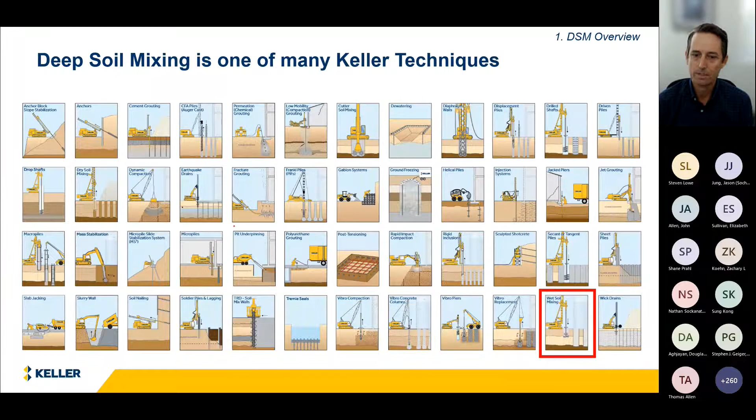So deep soil mixing is a technique where we use a large, high torque drill rig, and we mix a binder that's typically water and cement in a batching plant. Then we pump that water-cement grout down through the hollow stem of the Kelly bar and into a mixing tool that mechanically blends it with soil to create soilcrete.

The soilcrete has a compressive strength. Typically for design, the average strengths run from like 100 to 500 psi. The typical depths of treatment run up to about 110 feet, and that can vary even deeper in some cases.

The columns can be combined to form panels or grids or clumps of columns. It's very flexible, the way you can arrange them to pick up loads and resist seismic forces.

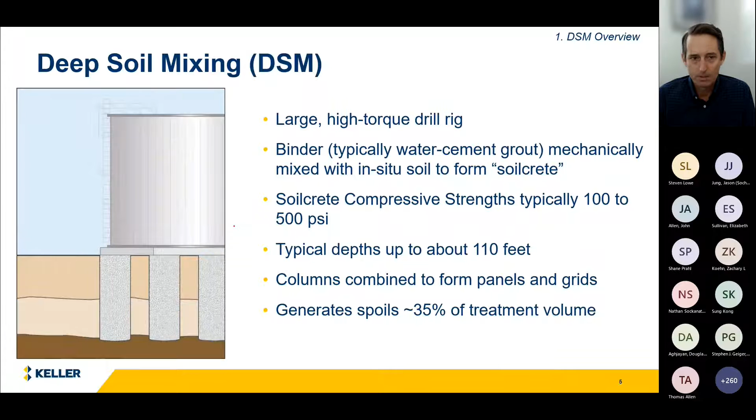One thing to note is that the technique generates some spoils, because whatever volume of grout you're pumping into the ground becomes essentially the same volume of spoils that come out of the hole as mixed soilcrete. That needs to be either disposed of off-site, or if processed, it can make a really good compacted structural fill on-site.

Here's a typical layout you would see at a soil mixing operation from Keller. Number one, you have the batch plant in the upper right corner, where we have silos of dry cement powder. You see the delivery truck - we need room for a delivery truck to come in and charge those silos regularly throughout the day. In the middle, there's the tank where we mix the water and cement to make the grout, and then it's pumped over to the rig down the hole.

You also see the deep soil mixing rig doing the mixing itself, and a pre-drill rig that we sometimes use to either pre-loosen holes or create a cavity to allow some of the spoils to fill in, as opposed to hauling them off-site - that's one way of reducing the amount of spoils. You see a loader; we typically have a loader and/or an excavator moving spoils around. And then you see a coring rig, where we're doing our quality assurance coring of the columns - I'll talk more about that later.

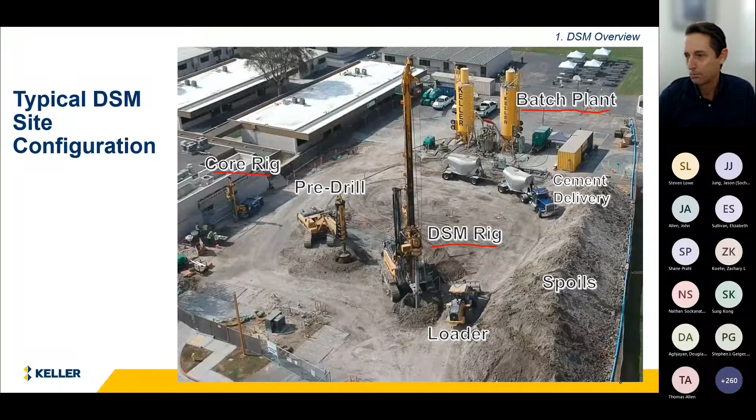Here's a couple other photographs. On the left side, you have the batch plant. On the right side, the soil mixing rig with the wet soilcrete, and previously mixed columns along a panel. You can see that the wet soilcrete is sort of like a peanut butter shake consistency, and within a few hours it typically sets up. But you need to be careful around the wet soilcrete holes - safety is an issue - so we're typically barricading and blocking areas off so people don't walk around or equipment doesn't come close to the wet columns.

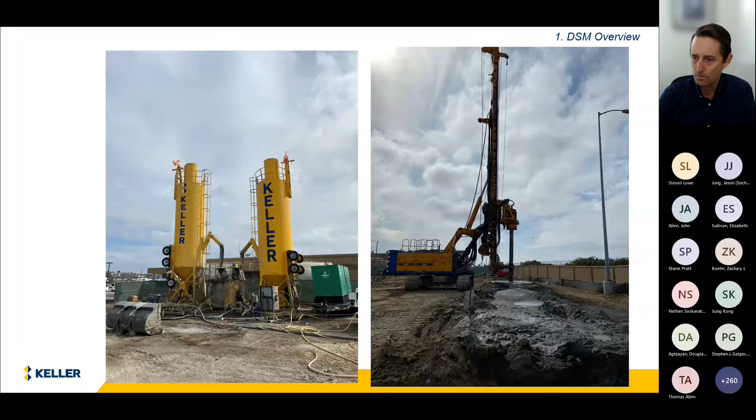Here are some examples of different configurations we can use for various applications. On the left, you have shear panels that we can arrange to resist slope instability. In the middle, you have isolated columns, which can be used primarily for settlement mitigation. And on the right, you have a lattice grid of intersecting panels that can be used for liquefaction mitigation primarily, or for seismic or static settlement mitigation as well.

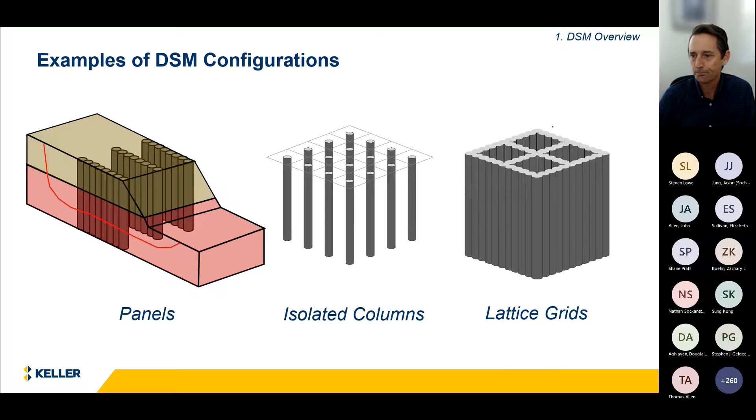So when we talk about deep soil mixing mitigation for seismic hazards, we have three effects that are occurring when we do deep soil mixing. One is solidification. So whatever material we are mixing is going to be turned into a solid, something like a soft rock.

And then we have shear reinforcement. So typically we're not mixing 100% of the soils, so any soils left in between, like in the lattice grid of panels, is shielded by the shear reinforcement of the DSM grid. I'll talk about that a little bit more in a minute.

And then for foundation load support, we're able to put these underneath the foundation so that we can just take up the loads in the DSM, and it's acting kind of like a deep foundation in a way.

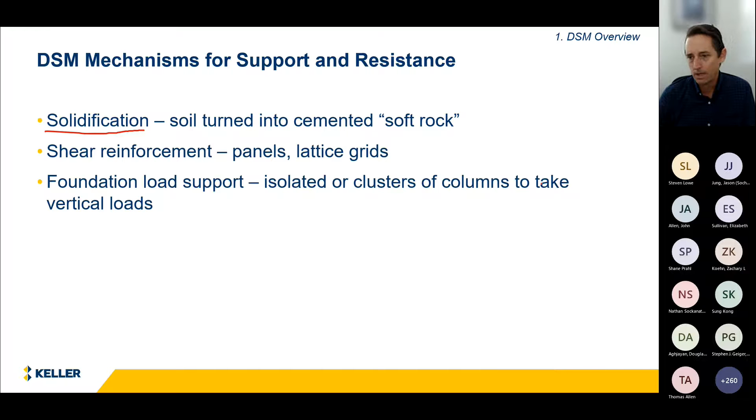So for the shear reinforcement, there's been some research done on this topic. Basically, a series of numerical analyses and centrifuge experiments were done where we looked at how much of the shear stress is going to be taken by the DSM versus the soil left in between the DSM cells. These relationships were developed where we could estimate the shear stress reduction, or the cyclic shear stress reduction, of the soil in between the panels.

And this chart shows the results of that. G sub R is the ratio of the shear stiffness of the soilcrete to the soil, so that typically is ranging around 20, 30, something like that. And AR is the area replacement ratio, so that's just the area in plan of soilcrete divided by the total area.

With deep soil mixing for liquefaction mitigation, we're usually ranging in this 25% to 50% range for AR, and around 20 or 30 for the GR. So with that kind of range, you can get these R sub RD values, that's the reduction of the cyclic stress ratio, or you can think of it as a reduction in the seismic demand or peak ground acceleration that you're using for your liquefaction analysis. Those reductions are on the order of 80 to 90%, which is very significant.

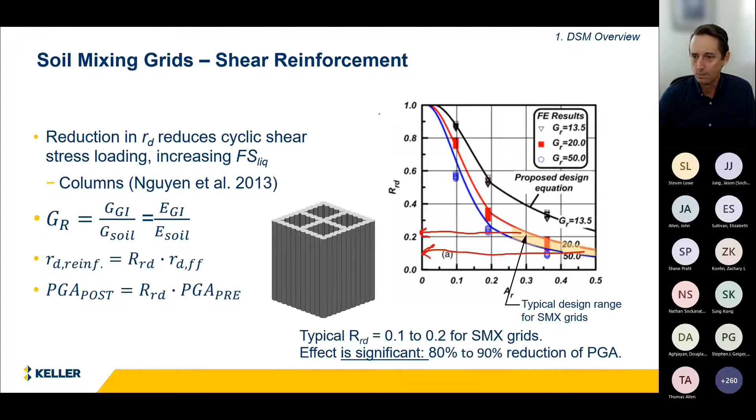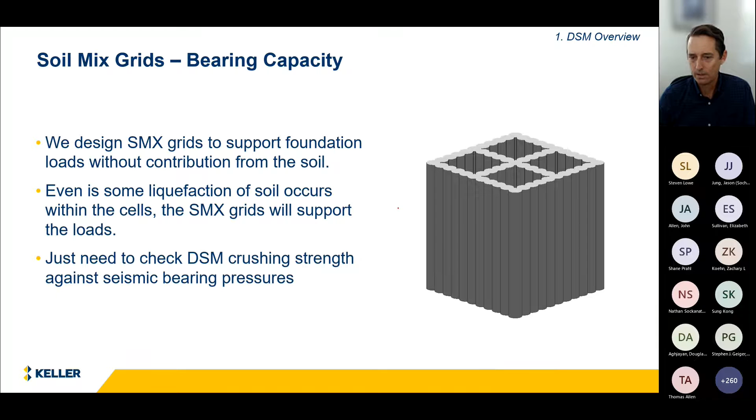And for bearing capacity, we design the soil mix grids to support foundation loads without contribution of the soil in between. So even if there is some minor liquefaction left over that the shear reinforcement doesn't take care of, we're still going to design these DSM grids to support the foundations without any contribution from the soil whatsoever. We just need to check the DSM crushing strength to make sure that we have adequate bearing pressures for the foundations.

Quality control and assurance is a big part of a successful soil mixing job. It starts for us at Keller with a data acquisition system, which records data from our rigs, which are very heavily instrumented. We're recording things like the time, the depth of the tool, the rotation speed of the tool, the hydraulic pressures for crowd and for torque, the grout flow rate, the grout specific gravity, and other parameters that really allow us to track what's happening in the ground very well.

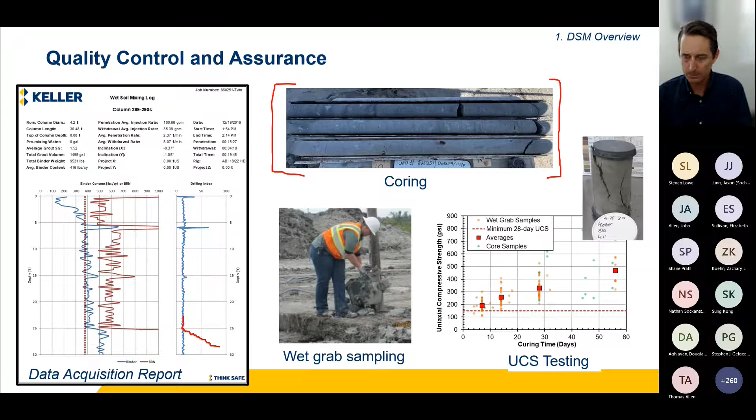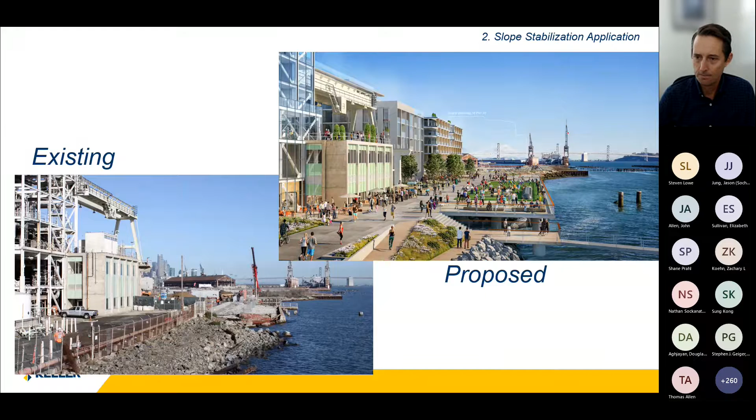But the site, like most sites around the San Francisco Bay margin, is underlain by young bay mud, a normally consolidated to slightly over-consolidated clay subject to cyclic softening under strong earthquake shaking in the San Francisco Bay Area. It's overlain by old fills that had some liquefiable sands within them. The geotechnical consultant determined that the slope would be prone to 2 to 4 feet of seismic slope deformation as a result of the maximum considered earthquake at the site.

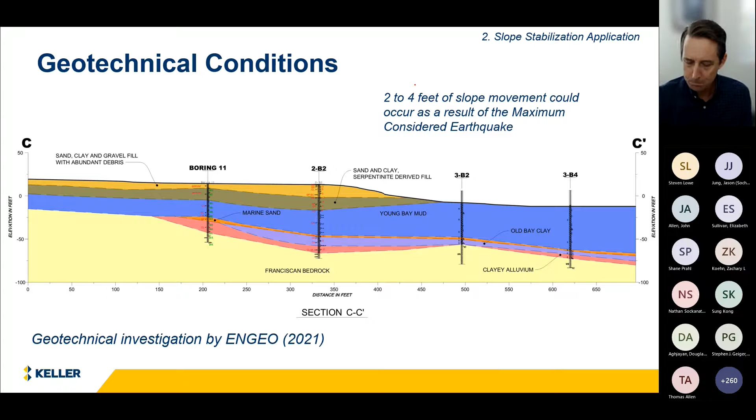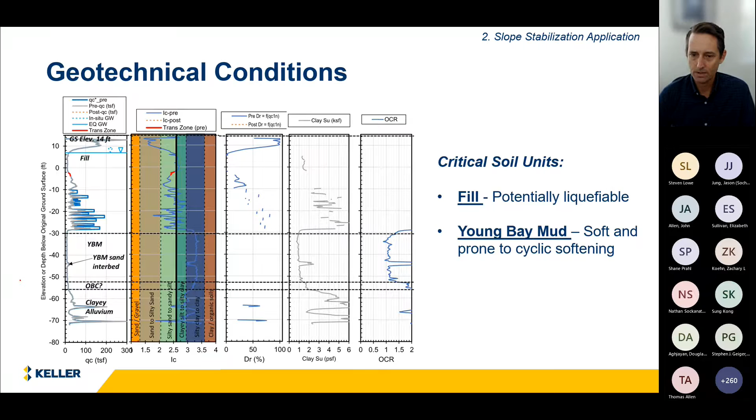To stabilize a slope like this, we can use the shear panels I showed earlier. There are some good references for this in the literature. The FHWA 2013 design manual for DSM is a pretty good one, although it's focused mostly on static criteria and static projects, so it requires some adaptation for seismic purposes. Another good reference is Boulanger and Shao 21 from the DFI soil mixing conference in Poland. I have all these references in the last slide of the presentation in case you want copies of them.

So we do design checks for global stability, overturning and sliding, the shearing on the vertical planes where you have overlap of the columns, for bearing capacity, and for extrusion or flow of soil in between the panels.

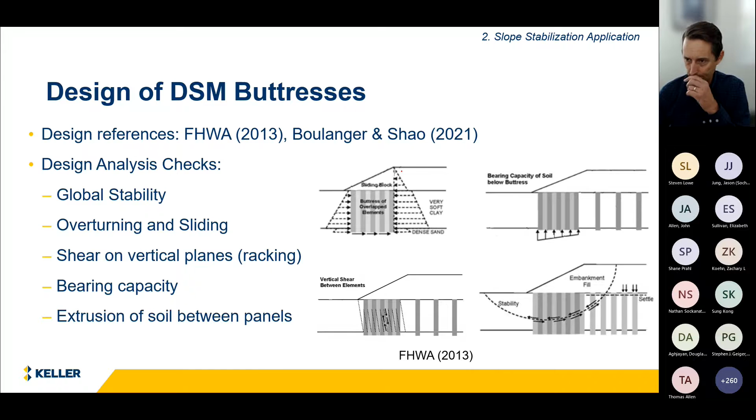At this site, this is basically what our layout looked like. From the plan view, we had 11 columns overlapping—6-foot columns overlapping in a secant way. That's what it looked like in plan. They were typically spaced around 20 feet, and this extended quite a ways in either direction along the front of the water.

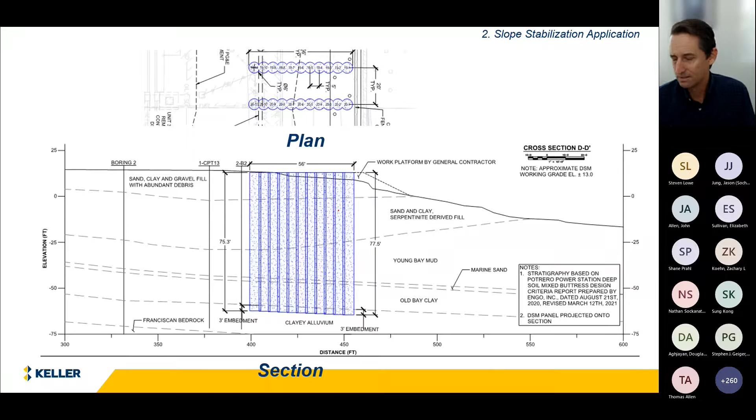If you look at it in cross section, this is the lower diagram. The depths varied in order for us to get embedment into the competent layer, varying up to 75, 80 feet. Some are probably more shallow, like 50, 60 feet.

In this design, we went about it using performance-based methods, looking at the expected deformations and the engineering performance. Here are some examples from different earthquakes of deformations that have occurred as a result of liquefaction lateral spreading, on the bottom two, and as a result of liquefaction flow failure on the upper right at the lower San Fernando Dam failure from the 1971 San Fernando earthquake.

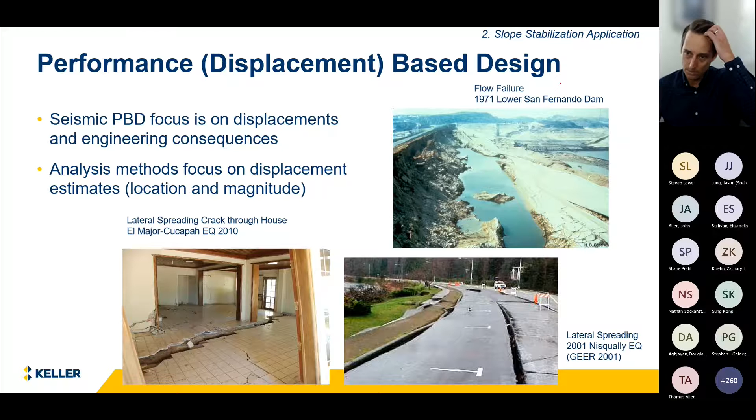Ideally, we would like to use advanced numerical methods to predict displacements for performance-based design when possible. This project, we had the time and the requirement to do this kind of advanced analysis, and we went about it using the computer program FLAC, which is a finite difference method program.

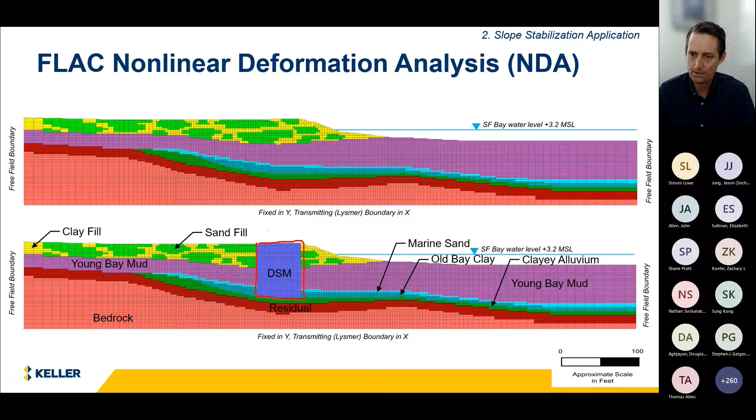Here you see the model on top with the soil layering and the finite difference mesh. This is without the DSM buttress, and the lower one shows the DSM buttress in place. That's a composite material based on a smeared composite stiffness and strength of the DSM and the native materials.

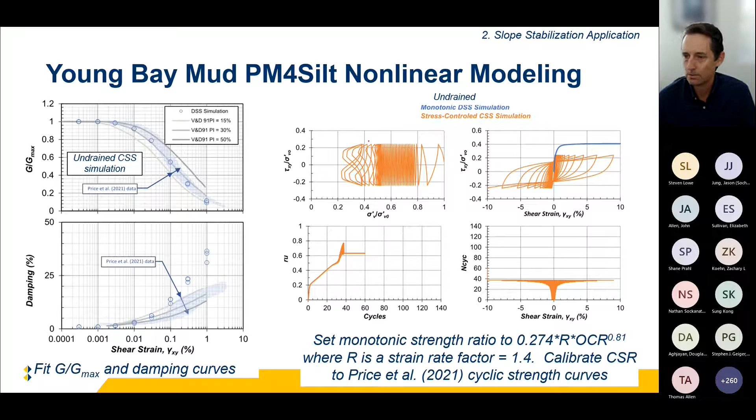We used the PM4 silt model for the Bay mud, calibrated rigorously to published data and some of our site-specific shear strength and shear wave velocity data. The calibration process starts with matching the modulus degradation and damping curves as best as possible, then you look at the cyclic softening effect and the cyclic strength of these materials. We also used PM4 sand for the liquefiable fill materials. I don't show that calibration here, but it was also a critical model used in this analysis.

Here we have the unreinforced slope on top, and you see we're getting about 2.5 feet of slope displacement at the crest. This agreed pretty well with the consultant's estimate of displacement. With the DSM buttress, you can see that behind it, we're controlling the displacements very well—basically less than 3 inches. We still have a lot of movement of the slope in front of the DSM, but even with this material displacing a foot or two and pulling away from the DSM, it still remains stable against overturning and sliding.

I should say that typically to achieve this, you need a DSM buttress that has a width-to-height ratio on the order of about 80%, similar to what you would do for any kind of gravity wall or MSE wall.

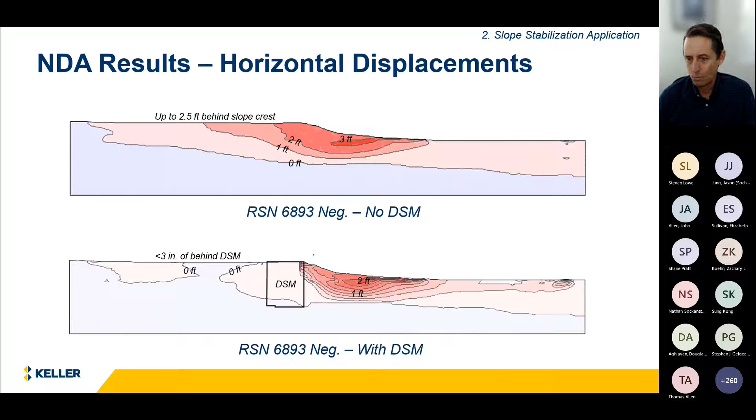We compared the nonlinear deformation analysis from FLAC with the more conventional limit equilibrium analysis. It's always good to do checks with more simple conventional methods when running a more advanced model. In this case, we got similar displacements. The FLAC displacements, depending on time history and polarity used, were about 0.75 to 2.5 feet. When we looked at the displacements with a Newmark-type analysis using the Bray-Macedo method, we were getting median displacements of around 2 to 3 feet. But if you account for the standard deviation or variability of those displacements, you probably get a much wider range than what we estimated with FLAC.

That's probably one of the big benefits of running FLAC: it narrows the band of possible displacements, typically when you have a well-calibrated and controlled set of ground motions, compared to these more generalized simple methods, which give a wider range when you account for the uncertainties involved. The other thing you get out of a FLAC analysis is a much better understanding of the patterns of deformation possible at the site, whereas with simple methods, you're just looking at a single slip surface and the displacements possible along it.

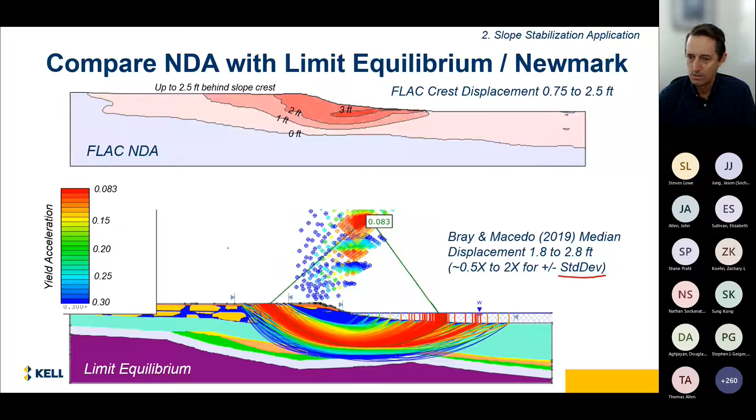So with the DSM, this is the result that we get that I showed before on the top, and then the simplified method. Again, we got similar results, but the deformation patterns are much better and easier to understand from the FLAC analysis than they are with the simple method.

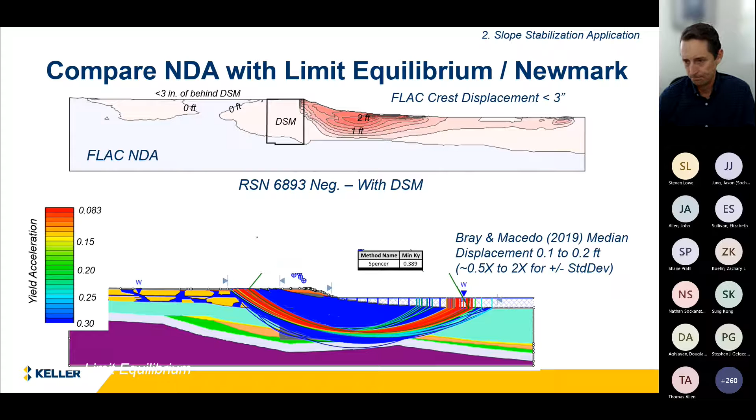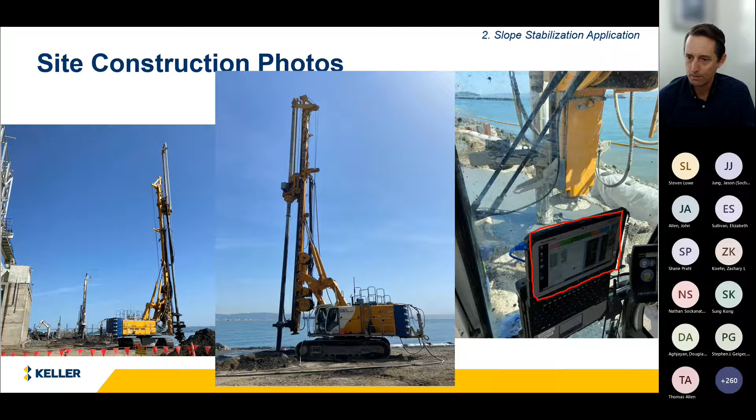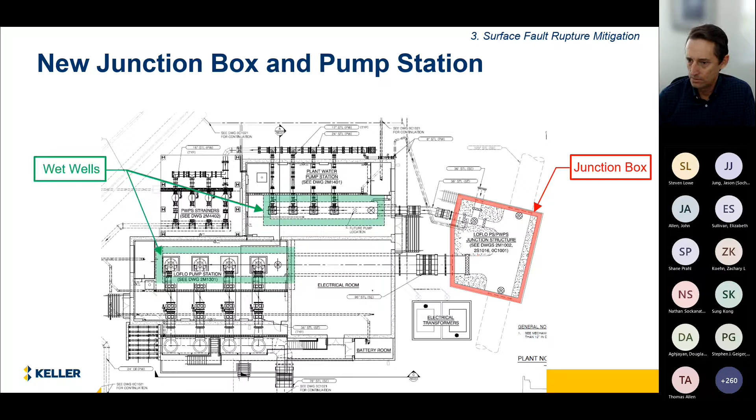Okay, the next project is a pretty unique one. It's on surface fault rupture mitigation. At this site, which was a water treatment plant, you had a large diameter pipe coming in, 120 inches. The project was that they need to tap into this and redirect some of this water to other places in the plant. So the project was to build a junction box, and from the junction box would run pipes over to wet wells, and the wet wells would pump the water elsewhere in the plant.

So these wet wells extend down below the ground surface, and then there was an above ground structure for the pump station. If you look at a cross section cutting through here, it'll cut through the wet wells and the pump station. This is what it looks like.

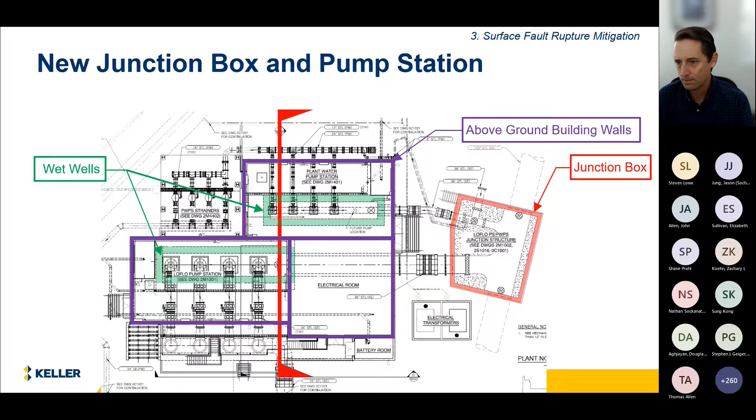At the site, you had medium stiff silt and clay layers at the surface, with loose to medium dense silty sand that was liquefiable, about 15 feet deep or so. Then you had medium dense to dense sands mostly below that were fairly competent, with bits of liquefaction here and there. There was a liquefaction lateral spreading hazard at the site, but the biggest problem was that there were active earthquake faults going through the site.

This is a very congested site, and it's not possible to site this pump station anywhere else within the water treatment plant. So we had to mitigate the seismic hazard of the faults going through the pump station.

Now, if you have a structure that's just at grade with faults intersecting its location, the best strategy is just to build a big mat. There's been some projects where they'll put a reduced friction interface at the bottom of the mats that allows the ground to displace, for strike slip faulting. That allows you to just let the ground move underneath the mat, and the mat can just kind of surf it out with all the trouble happening underneath it.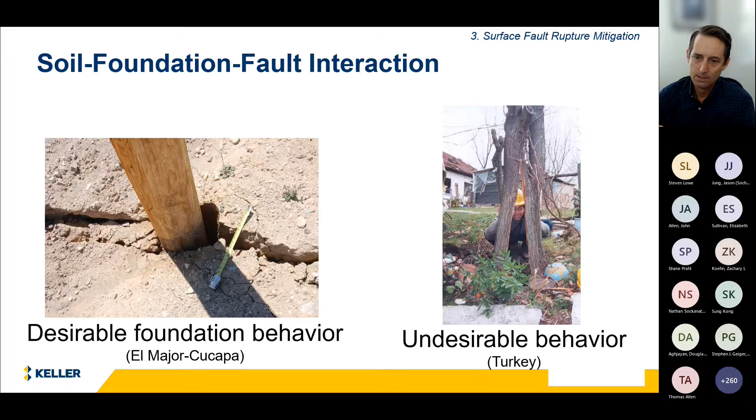So our strategy to mitigate that was to build a big block of deep soil mixing, where the faulting would come up, hit the soil mixing, and the whole thing would deflect around it, and the structure would act more or less as a rigid body.

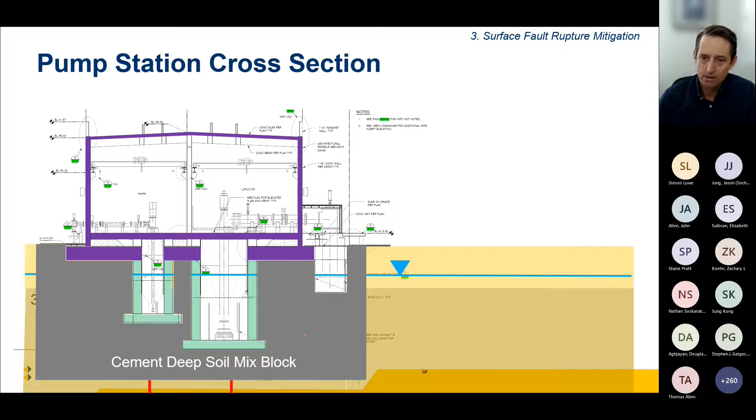As far as we could tell, this was the first project that took this approach, so we wanted to be pretty rigorous in our evaluations to make sure that it would work. We used a 3-dimensional FLAC model with a pretty large domain. It included a lot of details, including the faults, modeled using interface elements, and it included the structure of the pump station, which I'll show you in a second. Let's see.

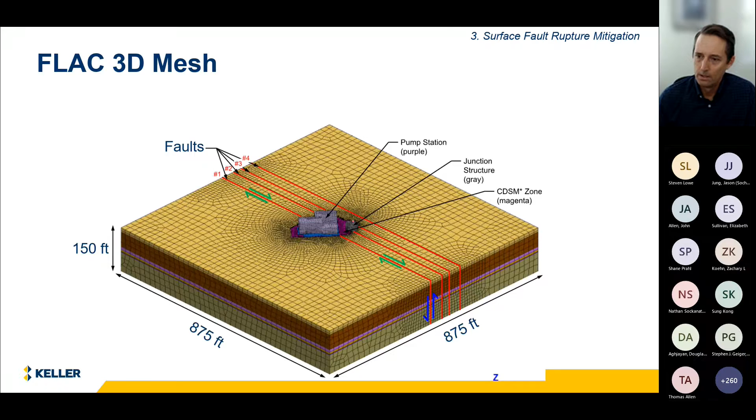And the wet wells and so forth. So we explicitly modeled all the elements that were important to the behavior, trying to confirm that the DSM acts as a block without rupturing. We calculated the displacements of the structure and provided those to the structural engineer, who performed their own check on the structural performance.

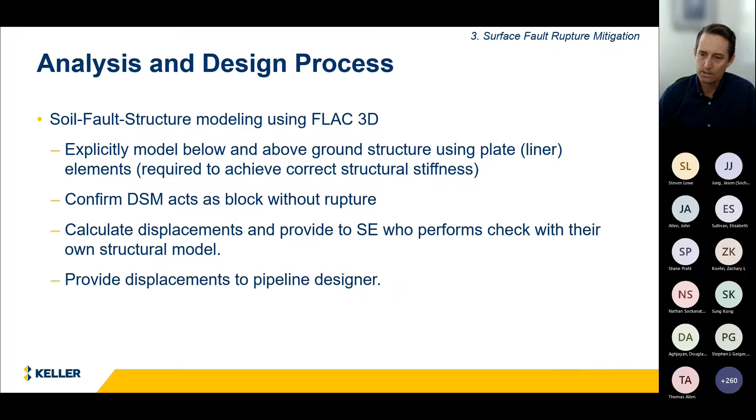We also provided displacements to the pipeline designer, who designed the pipes with flexible connections to accommodate any displacement that occurred. There's a lot of important elements to this kind of modeling for fault rupture, but one of the key things is to use a material model that includes the ability to do strain softening.

Because what a surface fault rupture does is concentrate the slip at a plane after the material has been sheared enough to basically reach a residual strength. That's why we see concentrated slip and faulting, because you've mobilized a residual strength. So you have to have a model that is able to do that, and there's a fair amount of research on this topic.

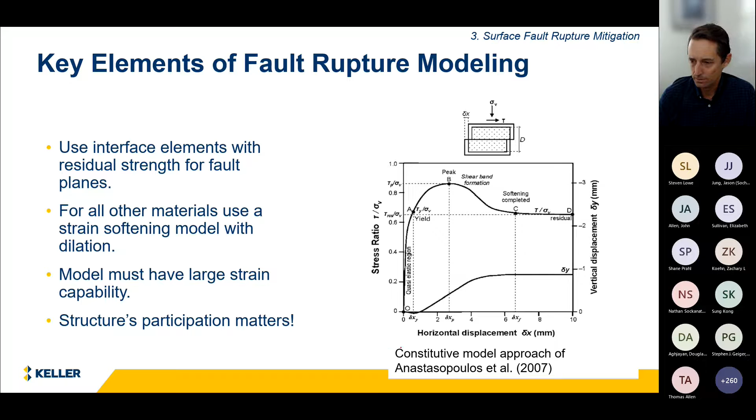Originally, we didn't include these building walls, the building itself. And when we provided the first set of analysis results for the wet wells to the structural engineer, they said, this is impossible, there's no way the structure is going to move this way. And we said, well, this superstructure is going to provide a good amount of stiffness that we're not including in the model at this point.

So we took the time to go ahead and add that in and rerun the analysis with it. And then we were able to generate some more realistic and compatible displacements with the structural engineer's model.

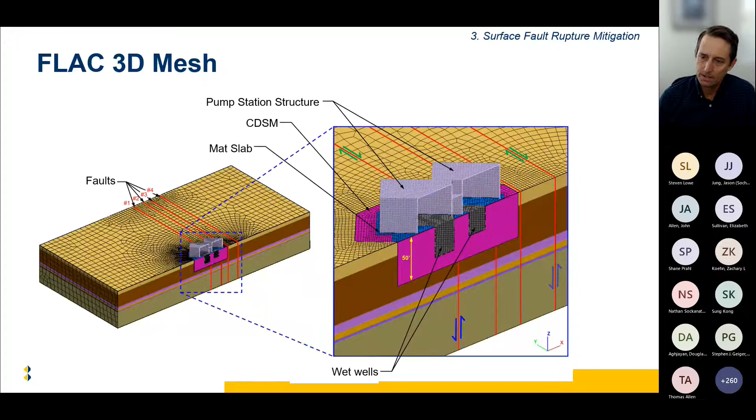So the faults come up here in red, and we basically put slip on one side of the fault and hold the other side steady. And here are the stages of the modeling: you start with the site, put the DSM in, build the structure and the faults.

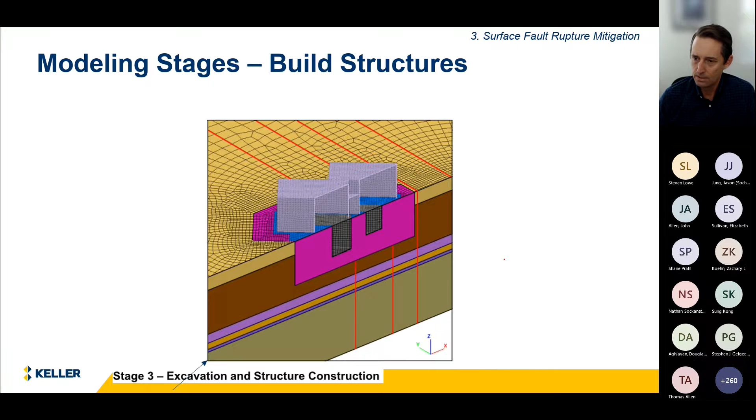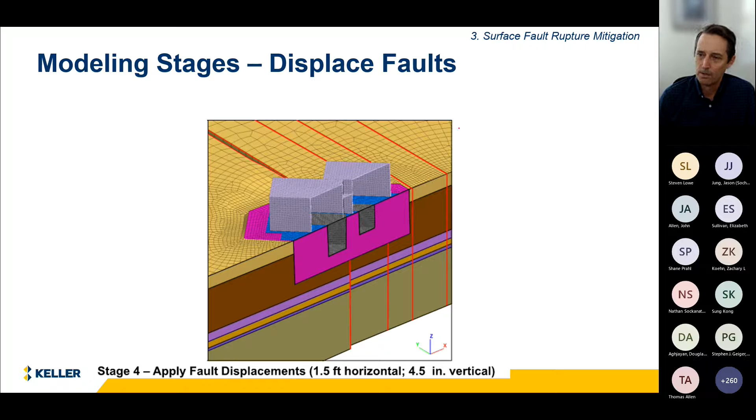So what you see here is all the fault slip happening on one of the strands. The fault displacement that we used was 1.5 feet of horizontal and 4.5 inches of vertical. These are actually secondary faults off of a primary fault that could displace a lot more than that.

So the first thing to do is to run the model without any structures in the way. You want the model to show that you're going to get concentrated slip at the fault interface. So this is what this result is without any of the structure there.

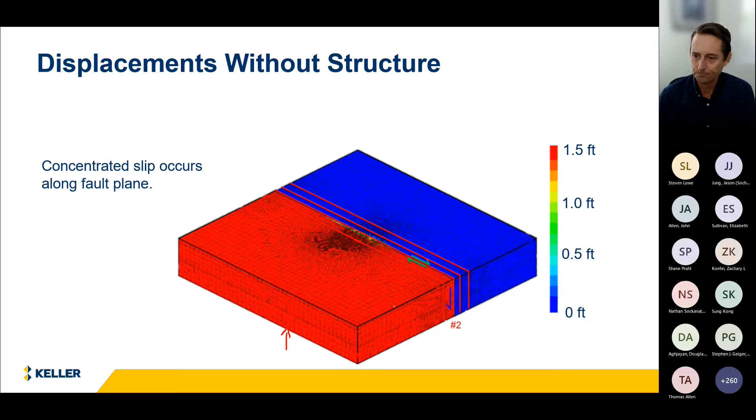So basically, in FLAC, what you're doing is putting a velocity on the sides of the model and on the bottom of the model, and you are holding that velocity until you reach that design displacement. Then when you put the structure in the way of it, you'll see that what was the concentrated slip in the free field now gets very evenly distributed.

And basically this whole soilcrete block did act like a rigid body, more or less. It did have some internal shear straining in it that was reflected in the results, but that degree was acceptable for the structure. You see that the slip is coming up from the bottom, it hits the DSM buttress, and it just gets distributed around, and the whole thing kind of rotates like a rigid body.

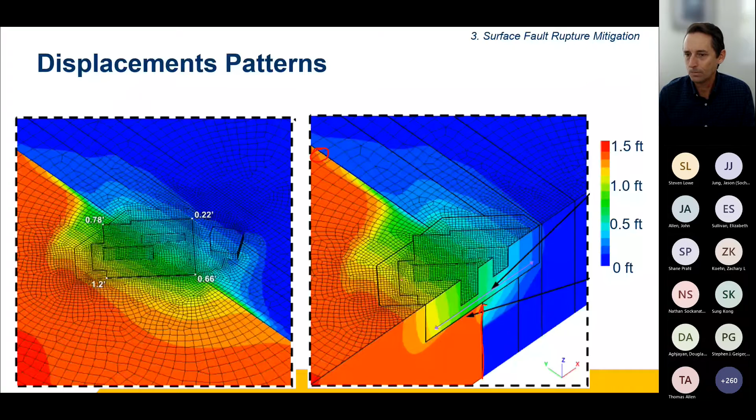So this is what the DSM elements look like. We need a full 100% soilcrete block, so all of the columns had to overlap with each other. And the design average strength was 500 PSI.

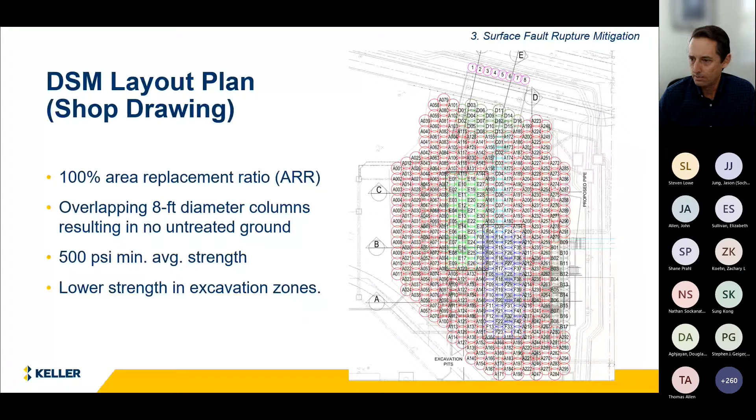And this is what the layout looks like. You see the different colors, green and blue, is where the wet well is. These are some photographs from the construction.

And here's what it looked like after the soil was mixed. Remember, these upper materials were loose sands and softer silts and clays, and now they are sandstone. And they are excavating in this. This is a 30-ish foot deep excavation that doesn't even need to be shored because it's basically sandstone now.

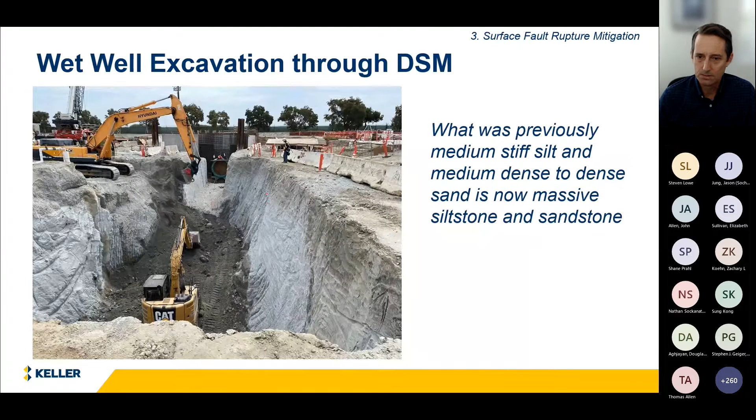All right, last one to share with you here is a sort of more conventional project. The surface fault one is kind of unusual, but this is a more conventional project. Here we have some aviation fuel storage tanks, new ones. There's a couple of existing ones. This is at the San Diego airport. So these are the existing ones, and the project was to build 3 new ones.

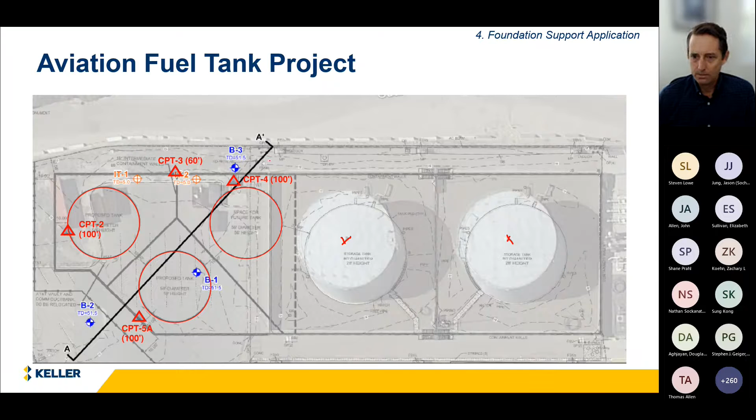If we look at a cross section through the site at the soil conditions, we have some fill in the upper 10, 15 feet. It was mostly sandy and liquefiable. Then we have bay deposits, which were interbedded soft clays and medium dense to loose sands. The sands were typically liquefiable, and the bay deposit clays were highly compressible.

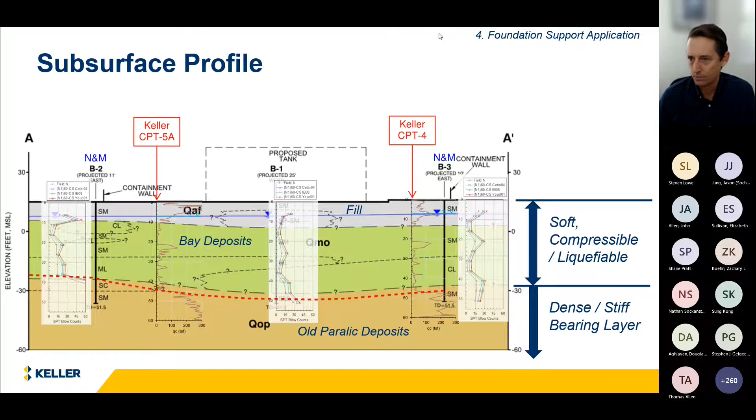So the problems at the site were with liquefaction, seismic bearing capacity, and static settlement and bearing capacity. So the solution was to use a mat foundation for the tanks and to build them on top of a deep soil mixing ground improvement zone.

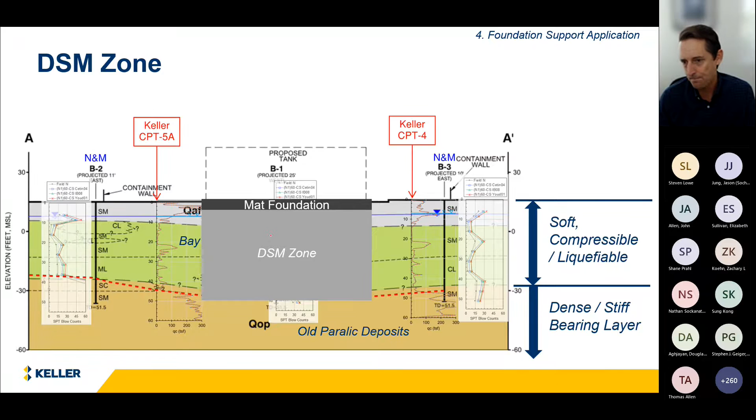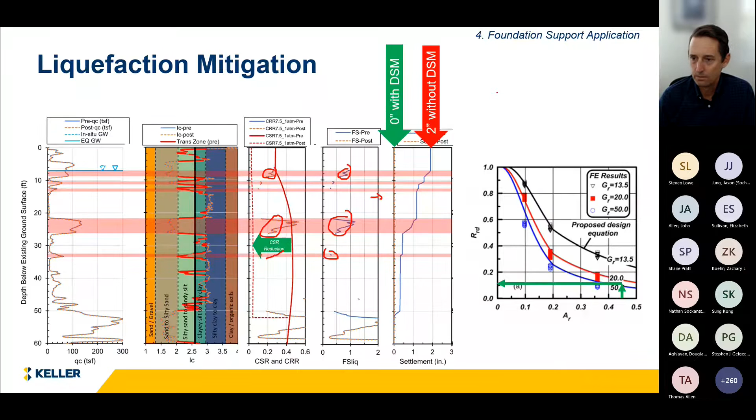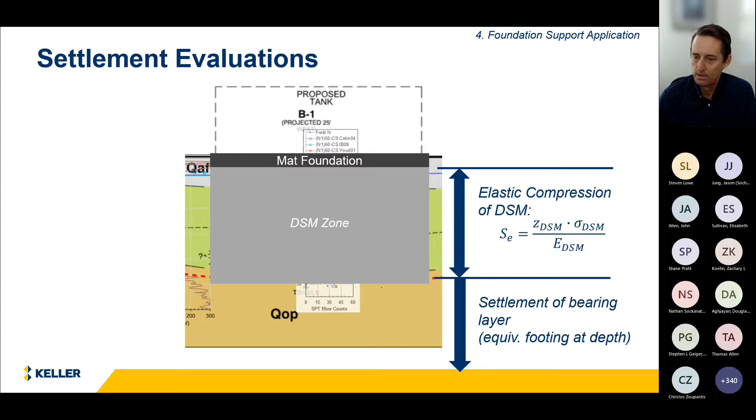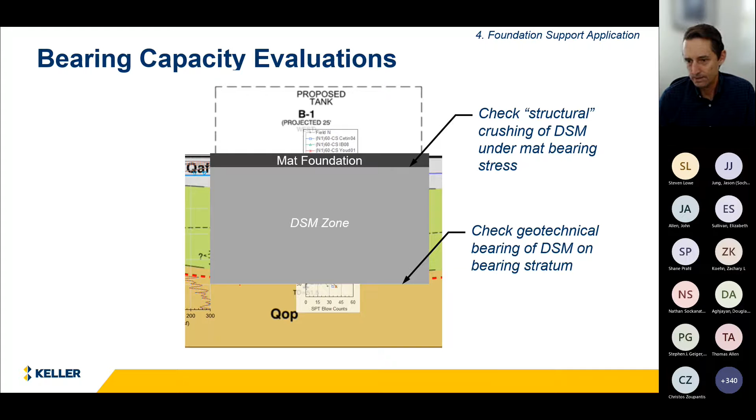You're also checking the crushing strength of the DSM from the foundation loads applied at the surface, and checking the geotechnical bearing capacity for the DSM bearing on the soil below it.

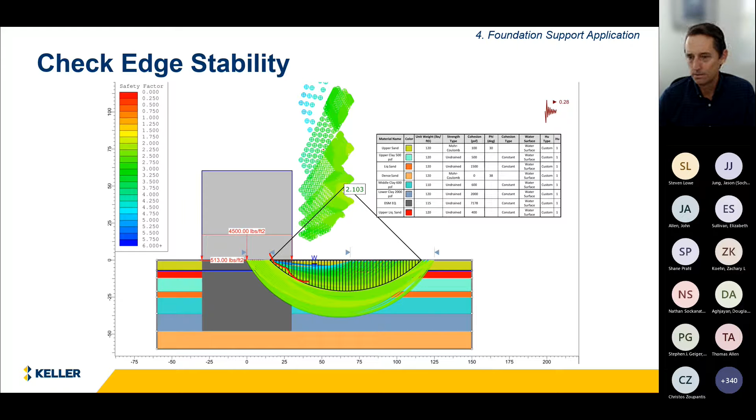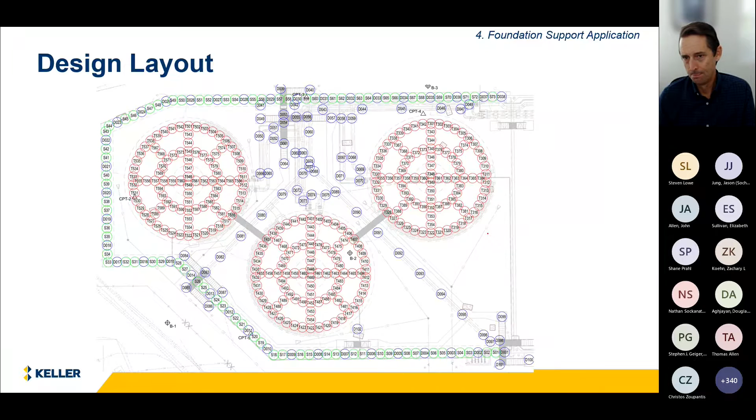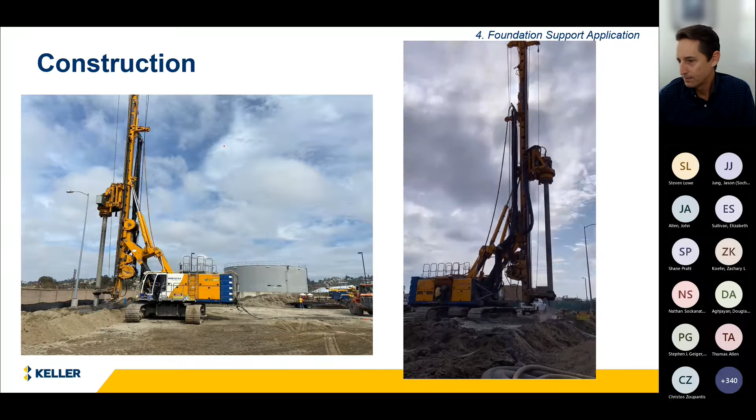So this is the rig. This is a time-lapse video of the rig constructing some columns. It's a little bit slower than that in the field, but the work was completed successfully, and those tanks are now standing.